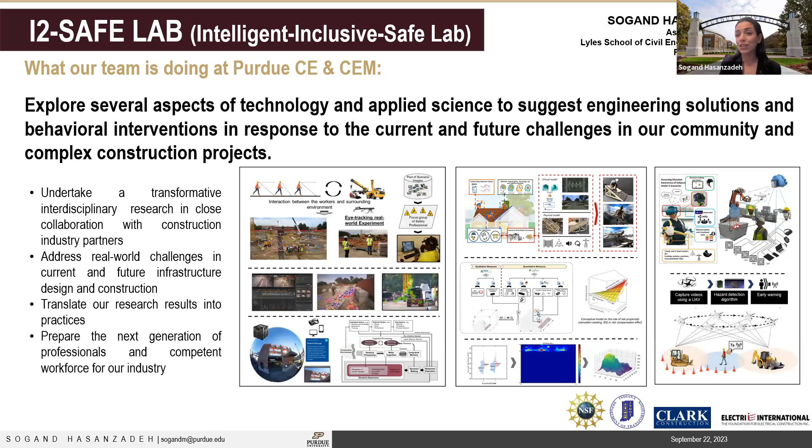The research that we are doing in our team is very interdisciplinary. We have civil engineering and construction engineering and management concepts, but we are combining that with psychology, neuroscience, computer science, biomedical engineering, and mechanical engineering, because nowadays in the new world we cannot solve the problem if we only focus on civil engineering research.

Interdisciplinary research, bringing different disciplines together and adopting different approaches, concepts, and technology from different disciplines will definitely help address the problem in a better way. You're going to see examples of that when Shiva starts talking about it.

So you see three key terms that we talk about. Our lab stands for the Intelligent and Inclusive Safe Built Environment. So developing intelligent infrastructure and technological advances to make sure that the construction job site or other workplaces will be an inclusive place.

And most importantly, we want to ensure that we will reach the highest project performance, especially safety. In this presentation, we're mainly going to focus on construction safety and a little bit about productivity. No doubt all of us know that the construction industry is one of the most hazardous industries worldwide, and when we look at the statistics, it's among the top in terms of number of injuries and fatalities.

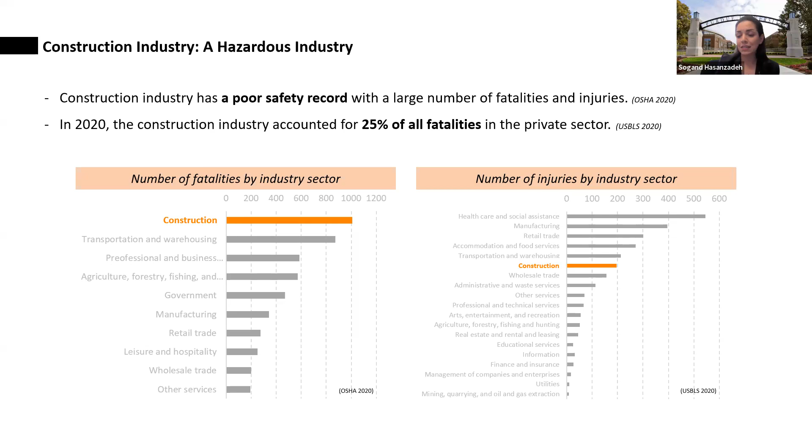One of the reasons this is happening is that when we look at any incidents in the workplace, it has two sides. When unsafe behavior coincides with unsafe site conditions, then we're going to have incidents. Many efforts are being made to have safety technological advances to make sure the construction job site or other places will be safe. But what will happen to that unsafe behavior?

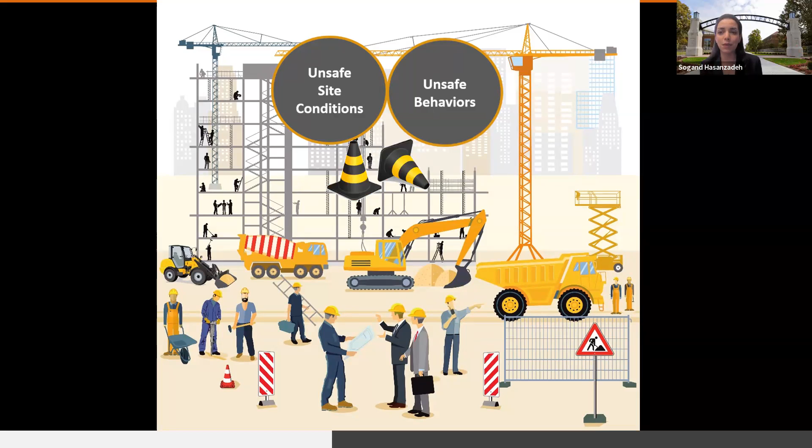There are many factors that can impact or lead to the unsafe behavior of workers. One of those is stressors. Stressors are nowadays capturing a lot of attention.

When we're talking about stressors, we're talking about internal stressors and external stressors. Internal stressors, like being impatient or being perfectionist, all of us suffer to some degree from each of these, which means the source of the stress is internal, inside the person. But there are other aspects, external stressors.

External stressors are related more to occupational stressors, the task that they are doing, the organization they work for, and the environment they work in. Shiva is going to expand on that later on.

When we talk about these types of stressors, the concern is not only going to be safety—we'll have concern about safety, health, and well-being of the individual. Mental health concern is already surging worldwide, and the construction industry is one of those industries where construction workers are more vulnerable to these challenges.

We're going to see high suicide rates, and high rates for mental health issues or concerns in the construction industry. One of the main contributing factors to these is stressors, and most of them come from external stressors—the work and tasks they're doing, the pressure they're under when working in the construction industry.

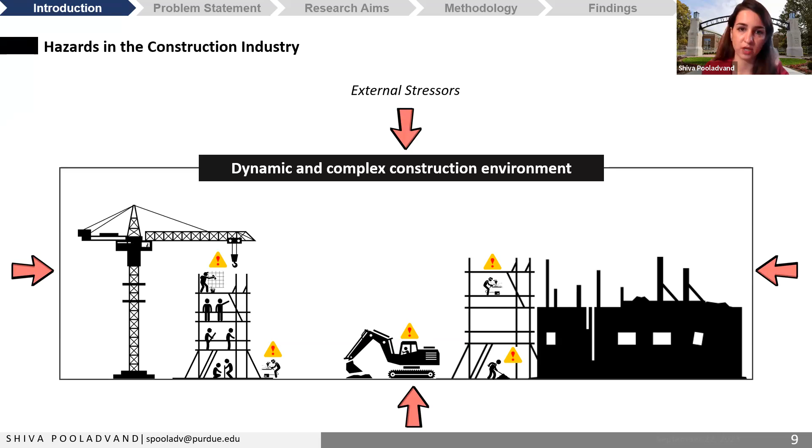Based on the literature, I have selected the most important external stressors to investigate their effect on workers' risk-taking behavior within the construction industry. The first category is task stressors, under which I'm going to talk about time pressure and mental demand. Then I have social stressors, under which I'm going to talk about peer influence or peer pressure. And the last category is environmental stressors, under which I have heat stress.

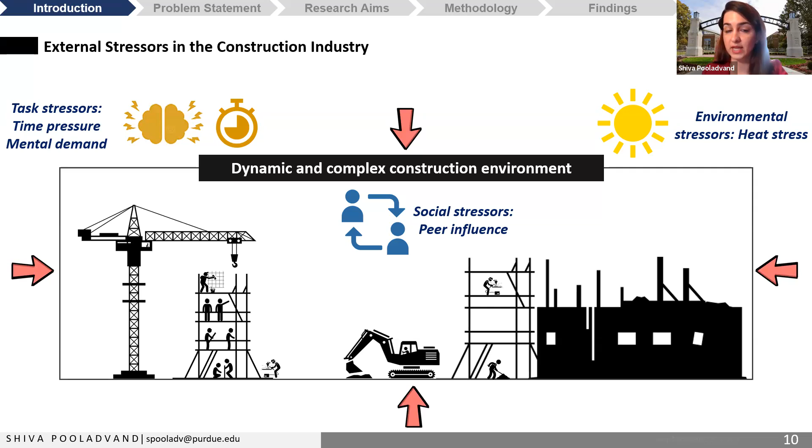Now we want to see why it is important to see the effect of these stressors on workers' risk-taking behavior. It is important because these stressors can increase human error.

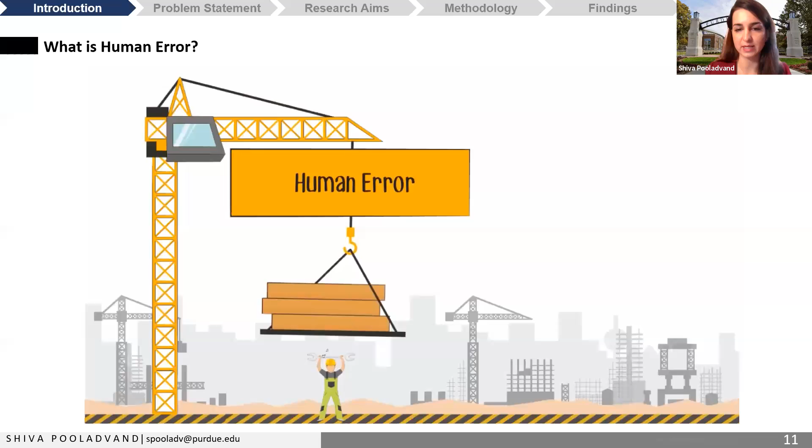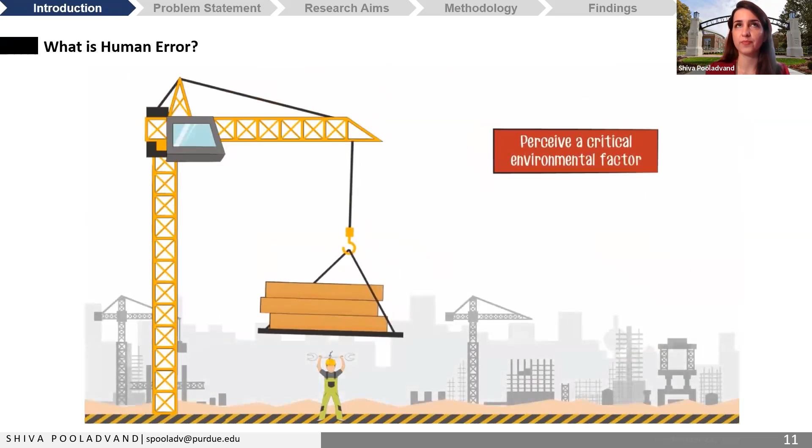Let's see what human error is. Human error refers to individuals' errors and mistakes, for example inaccurate judgment, which can happen due to lack of situational awareness. Based on the literature, human error has been identified as the reason for 80% of construction incidents. This is a huge number that can capture attention for further investigation.

Now we want to see how stress may cause human error. To answer this question, I want to go over the situational awareness model developed by Endsley. This is a very well-established model that has been used in many different kinds of studies investigating human error or human factors.

Based on this model, individuals process information in their surrounding environment based on 3 levels. After these 3 levels, they make a decision and then take an action. Let's go over each one of these levels one by one.

In the first level, individuals understand what is happening in their surrounding environment. This level is the perception level.

Then we have level 2, the comprehension level, in which individuals try to understand why they need to care that something is happening around them.

Then we have the third level, the projection level, where individuals try to understand what they need to do—something is happening, and now what do they need to do about that. After these 3 levels, they make a decision and take an action.

The point here is that stress can disturb each level of situational awareness, and finally it can impair individuals' decision-making process and cause unsafe behaviors, which can increase the rate of incidents within construction job sites.

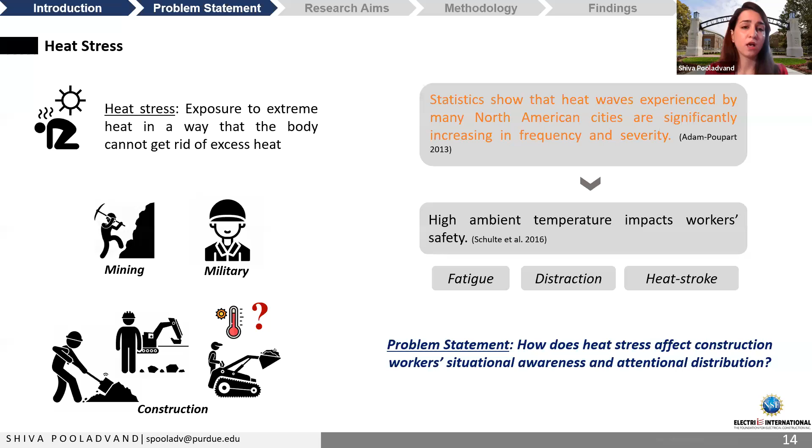Based on the literature, high ambient temperature can impact worker safety performance by increasing physical and mental fatigue. High ambient temperature can distract individuals and can cause various heat-related illnesses, such as heat stroke. Now the question is how heat stress can affect workers' situational awareness and attentional distribution.

Now I want to talk about the social stressor, peer pressure. Peer pressure means a feeling that one must do the same thing as others in the same group, to be liked by them, respected by them, or to increase their gains.

This is also a very serious concern within the construction industry, because most construction tasks need to be performed in a group of people. Workers need to work together to achieve a common goal.

There are different kinds of studies, for example in the driving area, about drivers' risk-taking behavior when alone versus driving with passengers. This is a very serious concern, but again no attention has been paid to it within the construction industry.

Based on the literature, we know the presence of risky peers can influence individuals' risk-taking behavior, and workers' risk-taking behavior on construction job sites is expected to impact each other's risk-taking orientations. The question here is how peer pressure can influence workers' risk-taking behavior and decision-making within hazardous situations in the construction industry.

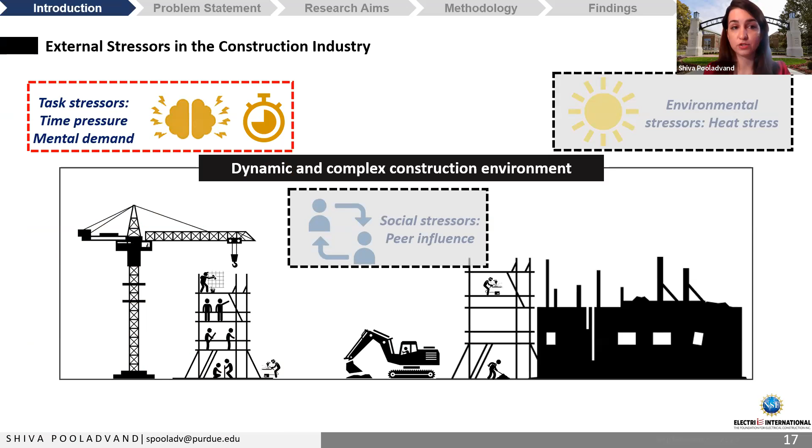The last category I'm going to talk about is task stressors, under which I have time pressure and mental demand. Let's see what time pressure is—it means being pushed to work faster.

Mental demand can happen when workers need to work on different tasks simultaneously. These two stressors are also very serious and common within construction job sites because of the dynamic nature of this industry. For example, these can happen when the project is behind schedule, so workers need to work faster to catch up, or work on simultaneous tasks together.

Such increases in productivity can put workers under stress and impair their safety performance. The question here is how these two stressors can impact workers' risk compensatory behavior, and also how these two stressors can impact workers' situational awareness.

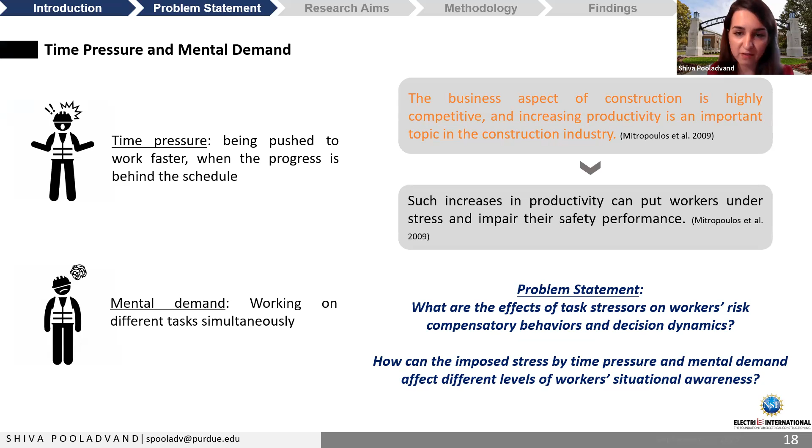Because I mentioned risk compensatory behavior, I want to give you a general overview. Risk compensation is a theory proposed by Wilde in 1986. Based on this theory, people try to adjust their risk-taking behavior to achieve a balance between potential risk and benefits they can gain from a hazardous situation. In the context of my study on construction safety, this theory means workers will take more risk if they are protected, because of a false sense of security.

These are the two questions I'm going to answer throughout my presentation. First, whether task stressors such as time pressure and cognitive demand can worsen the negative effects of risk compensation. Second, whether task stressors can increase workers' stress level and impair their situational awareness.

To answer these two questions, I selected a high-risk task within the electrical construction sector: the pole replacement task. This is a very common task where line workers need to work on high-energized power lines to replace an old pole with a new pole, removing energized power lines from the old pole to the new one without disconnecting the electricity. You can imagine this is a very stressful and high-risk situation.

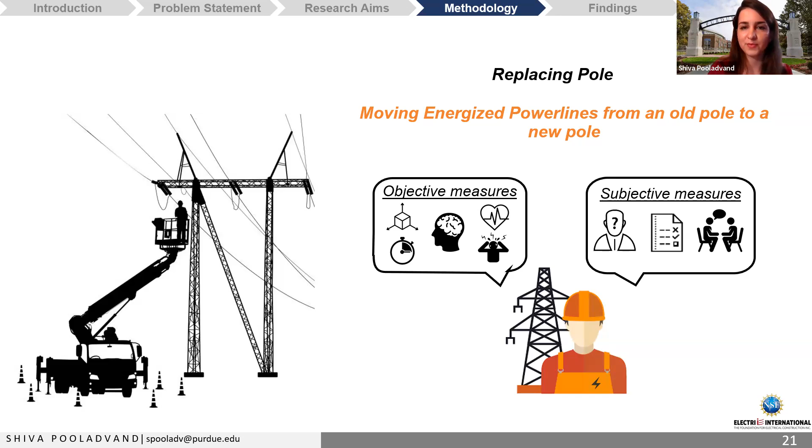Since it's not logical to ask human subjects to perform that high-risk task in the real world - because I want to do research, not kill people - and since I really need to capture the naturalistic behavior of individuals within those hazardous situations to answer those two questions, I developed a mixed reality environment, as you can see in this slide.

This environment consisted of two models: the virtual model and the physical model. The virtual model includes a 3D representation of a US suburban area, as you can see here. The physical model includes passive haptics, such as a bucket, insulating gloves, hot stick, and fall protection, as you can see. Passive haptic means the actual objects that are used in the virtual environment.

After synchronizing these two models, the virtual model and the physical model, I had the mixed reality environment. By adding different environmental modalities, such as the sound of passing cars or wind, I tried to increase subjects' sense of presence, meaning they felt they were actually in that environment.

After creating the mixed reality environment, I immersed the human subjects in that environment using a VR headset. Then I used motion trackers to synchronize the movements of the actual person with the virtual avatar in the environment, as you can see in this slide.

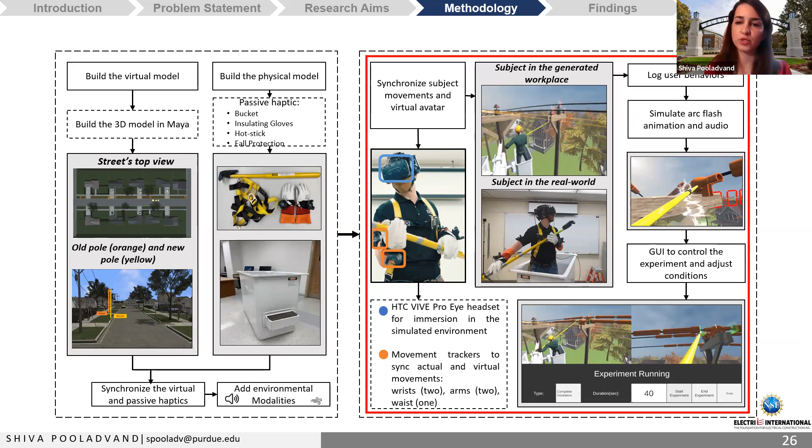This is the framework I used to immerse the human subjects in order to ask them to do the pole replacement task. In this environment, I asked them to perform this task under three different conditions.

In the first condition, the normal condition, I asked them to perform the task without any stressors, so everything was fine and they performed the task at their own pace.

In the second condition, I asked them to perform the task under time pressure, because I wanted to expose them to it. For that, I subtracted about 10 seconds from the duration it took each individual to perform the task in the first condition, and then asked them to perform the task again.

In the last condition, condition 3, I asked them to perform the task under both time pressure and mental demand - the time pressure was the same as condition 2. For the mental demand, I asked them to perform a secondary task, a 2-back working memory task. This is a well-established psychological task widely used to manipulate working memory resources, which are capacity-limited and important for decision making.

In the third condition, subjects were performing the main task, the pole replacement task, under time pressure, while also responding to the 2-back working memory task, hearing a random sequence of numbers and saying yes if the number matched the one from 2 trials ago. The demand on mental resources was much higher in the third condition because they were engaged with 2 tasks.

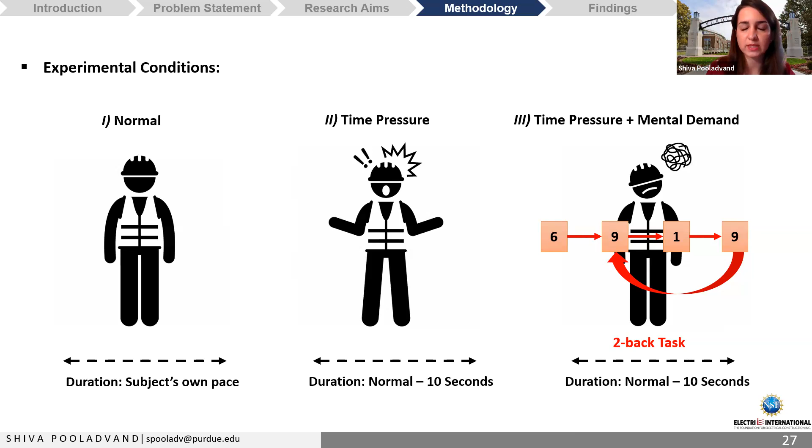There are also 2 other important points about this experiment: in all 3 conditions, subjects were provided with full protection, including fall protection and insulating gloves and everything they needed. And in the second and third conditions, they were told they would receive extra compensation if they could finish the task within the time.

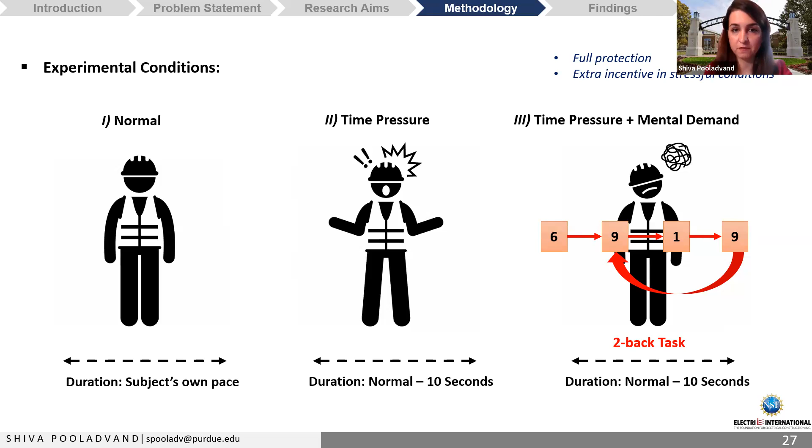When subjects were performing this task, I measured their real-time physiological and neurophysiological responses using different kinds of wearable sensing technologies. For example, I used fNIRS to measure their brain activation, an Empatica wristband, a medical wristband, to measure their stress level and risk perception, eye trackers embedded in the headset to measure their attentional distribution, and motion sensors to synchronize their movements and track their positions.

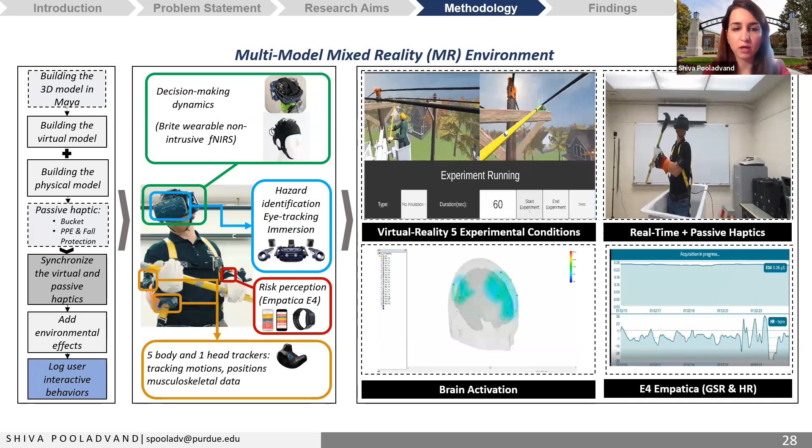So far I was explaining everything related to the experimental design and the data collection process, immersing human subjects in the environment to collect their data. Now I want to talk about the findings of this study. First, I want to look at the effect of time pressure and mental demand on risk compensatory behavior.

To investigate that, I used subjects' brain cortical activation, measured with fNIRS. There are different methods to measure human brain activation; the most widely used are fNIRS and EEG. But since EEG is very sensitive to motion artifacts, and in my experiment subjects needed to move a lot, I couldn't use EEG. fNIRS is more robust to motion artifacts, so I decided to go with fNIRS.

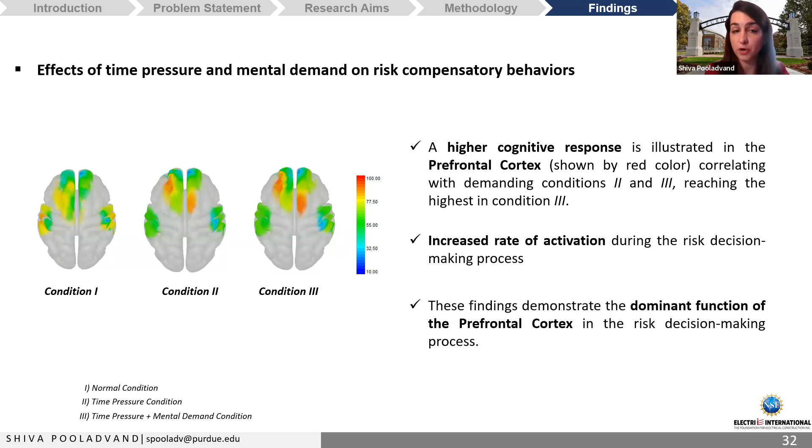Now I want to talk about subjects' overall performance, how they performed the task generally. I measured overall performance in each condition based on its nature. In condition 1, performance was measured based on not experiencing arc flash. In condition 2, it was based on not experiencing arc flash and completing the task within time. In condition 3, it was measured based on not experiencing arc flash, completing the task on time, and providing accurate responses for the two-back working memory task.

Let me explain what risk compensation is. Under stressful conditions, subjects perceived that they were protected and nothing would happen to them, so they just needed to worry about completing the task on time. So they sped up to finish on time, and ended up experiencing more incidents or arc flash in my experiment.

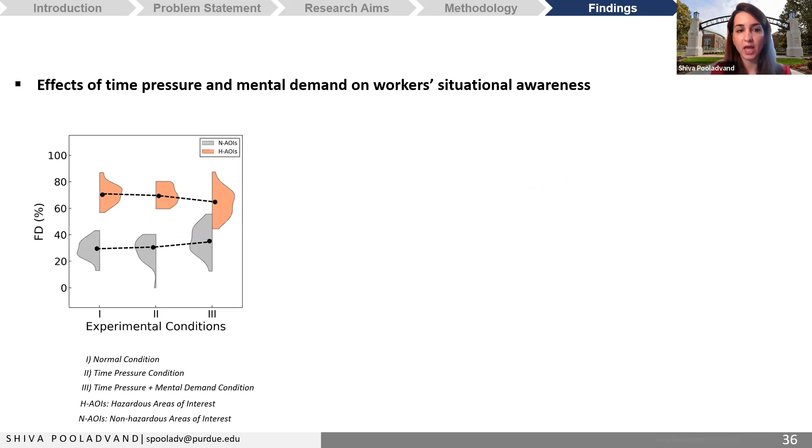Here you can see subjects' attentional distribution measured by the percentage of fixation duration. I selected this measure because each subject finished the task within a different amount of time. Since I wanted to compare them together, I normalized the data and went with the percentage of fixation duration, which is a measure of attentional distribution over the experimental conditions.

The gray color shows the attentional distribution over the non-hazardous areas, and the orange color shows the attentional distribution over the hazardous areas.

If you look at the graph, from the normal condition to the most stressful condition, as stress increased, subjects' attentional distribution on non-hazardous areas increased, while their attentional distribution over the hazardous areas decreased. So here we can see a cognitive failure known as attentional tunneling.

Attentional tunneling means the allocation of attention to particular information for a longer duration while ignoring other important information in the environment, which is the case within the stressful conditions, conditions 2 and 3 in my experiment. When subjects were under stress, that stress caused reduced alertness and impaired their perception of potential risk in the environment. So they couldn't properly allocate their attention to the important or hazardous elements in the environment, which could increase their risk-taking behaviors.

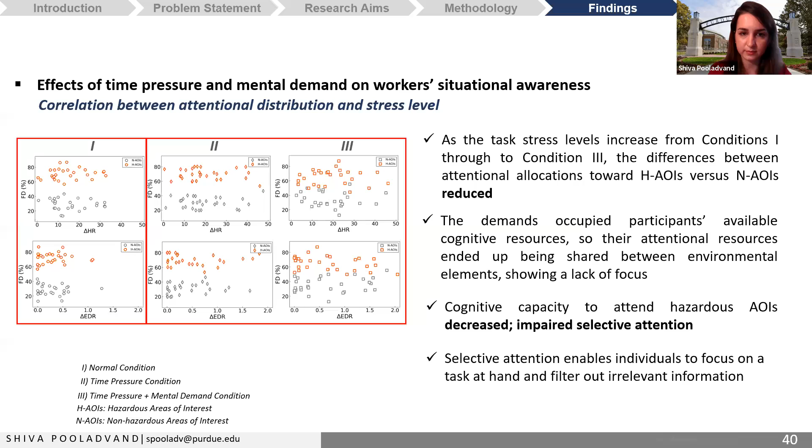Now I want to correlate all the results I've explained with the situational awareness model I mentioned at the beginning, proposed by Endsley. Based on my results, we saw that stress can impair subjects' hazard identification - under stress, they couldn't focus their attention on the hazardous or important elements in the environment. This is related to the first level of the situational awareness model.

We also saw that under stress, they didn't have accurate risk perception. They were stressed because of losing the compensation, not because of the risk in the task, which relates to level 2 of the model. Failures in levels 1 and 2 caused failures in level 3, where they didn't have accurate judgment. Failures in all three levels caused failures in decision making, so they had irrational decision making and ended up speeding up, which could lead to unsafe behavior.

These results are also correlated with the performance error I measured during each condition. Subjects had higher performance error in the last condition, which was the most stressful condition.

Based on all these results, we can conclude that more protection can produce a false sense of security, which can increase workers' risk-taking behavior because of the risk compensation effect. Also, time pressure and mental demand can increase workers' stress level, causing different kinds of cognitive failures such as impaired selective attention and cognitive tunneling. These two stressors can increase workers' risk-taking behavior.

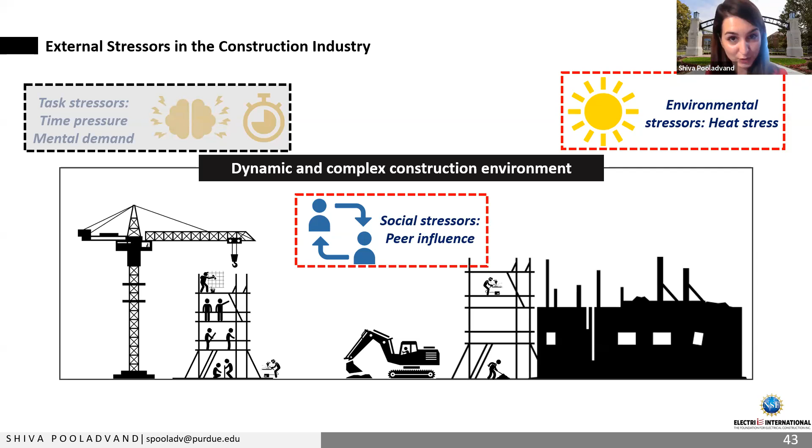Now you may be wondering what happened to the other 2 categories of external stressors I mentioned at the beginning. This is ongoing research I'm currently working on. To investigate the effect of those 2 external stressors - heat stress and peer pressure - I have developed the state-of-the-art extended reality environment you can see in this slide.

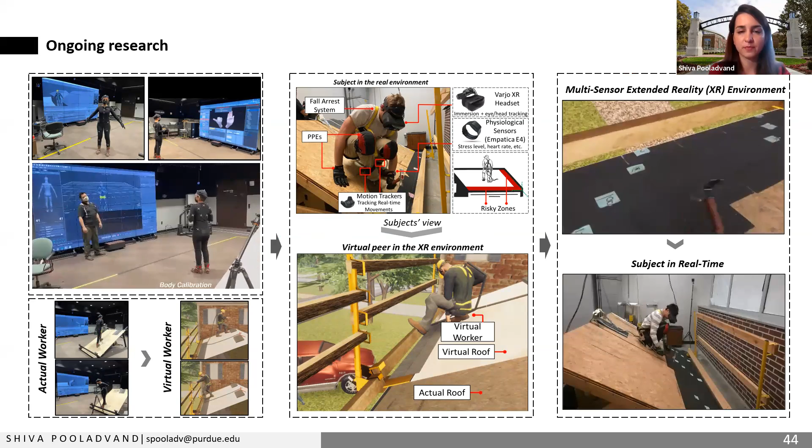Extended reality is a very cool and new environment compared to mixed reality and virtual reality, because it has a pass-through headset, so individuals can see both the virtual environment and the actual environment next to each other. It's a very unique experience.

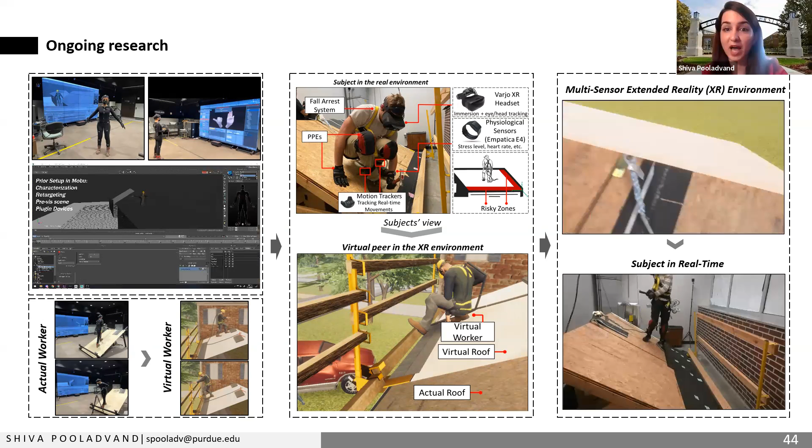Unfortunately, since I don't have time today to explain the results from this part of my research, I will be happy to have the opportunity in the future to go over all the details about this experiment, because I have simulated both heat stress and peer pressure in this environment, and the results are very interesting.

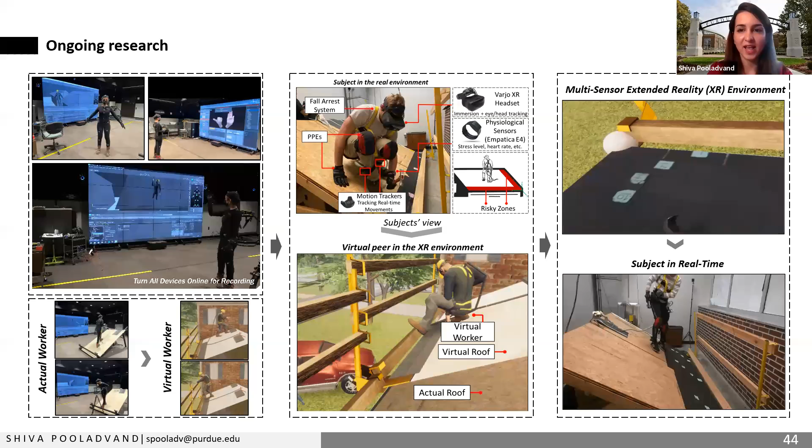And thank you so much for your attention.

Great, thank you so much, Shiva. So as you see, based on the limited time that we have, Shiva went through how task stressors are one of the main sources of stressors in the construction industry, and how it can impact workers - not only by subjectively asking them how it's impacting them, but seeing how it will impact their behavior by looking at their physiological and neuropsychophysiological responses.

So I think if you're interested and have questions about heat stress or the peer effect, she will be happy to answer those. But shout out to all our team members who helped with all the research that's going on, and even supported Shiva when she was collecting data. Thanks to some of you who may have also served as participants.

So we will be happy to answer any questions that you have. Thank you, Sogand. Thank you, Shiva. That was a very interesting presentation, and I'm sure there are a number of questions that people are wanting to ask. So please, I cannot see everybody, but open your mic and go ahead and ask your questions.